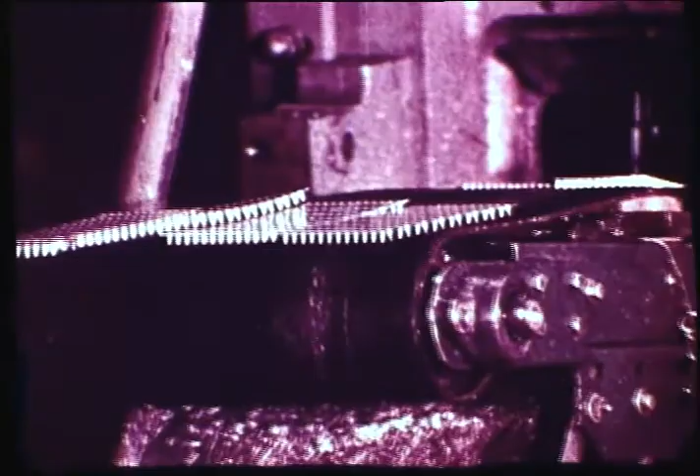Some of you know this story well. You've experienced it. Others are new to Alpine, and even to the industry itself.

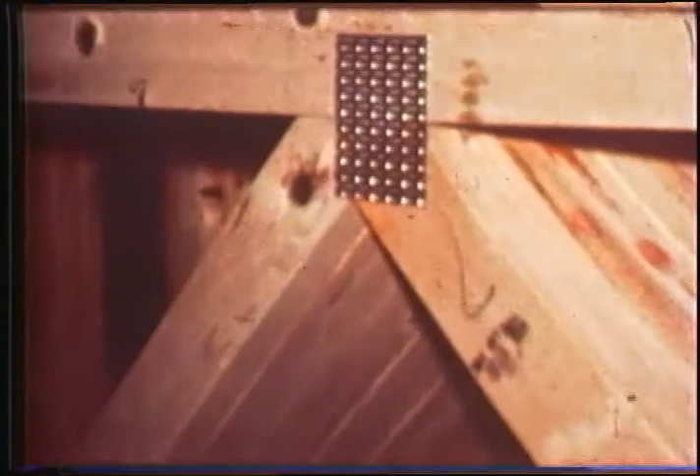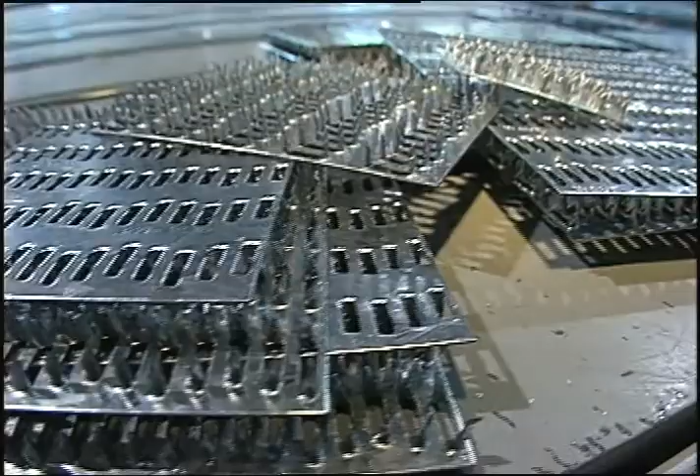The modern wood truss industry began nearly 50 years ago when Carroll Sanford replaced plywood gussets with metal nail plates that had teeth punched out to better hold truss pieces together. Over the years, many different connector plates were tried and tested for improved pressing and holding values. Today, the Alpine Wave Plate is the clear industry leader.

Five years out of Notre Dame, a young Bill McAlpin signed on as chief engineer with Sanford Company in Pompano Beach. A few months later, Charlie Harnden joined up as a salesman. By the middle 60s, they decided to go into business themselves, following disagreements with the strong-willed Sanford, who was not always as cheerful as he appears here.

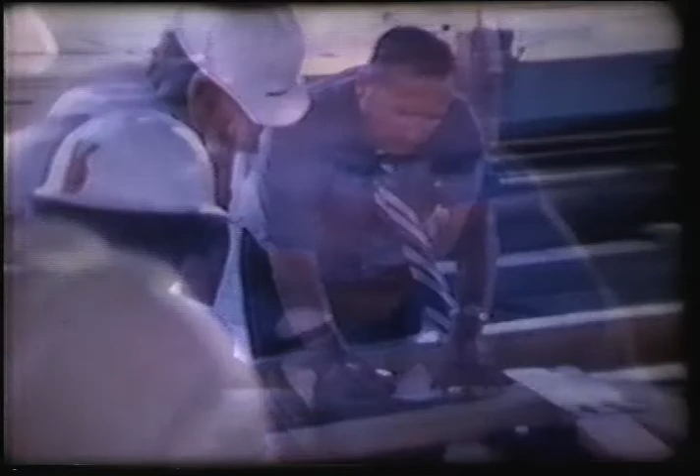Actually, he fired them. In 1966, Alpine's founders saw that the demand for safe, affordable housing far outweighed the ability of the building industry to keep pace. They realized that the biggest time saver during construction was to simplify roof assembly.

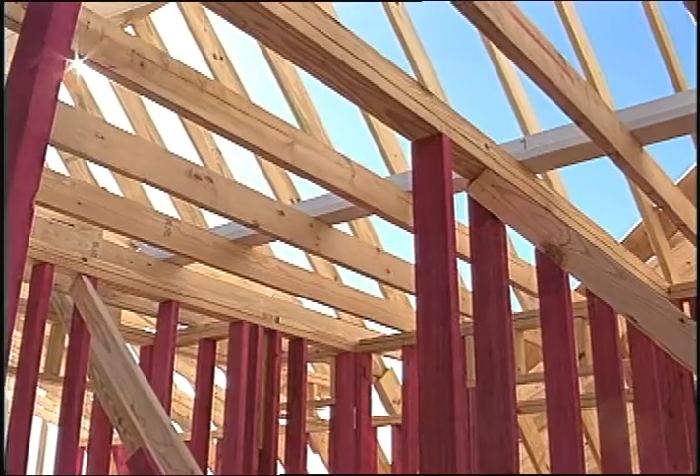Their business plan was pretty basic: design good, competitive trusses, sell the connectors that would hold the lumber together, and work closely with customers to get the job done, and done right. Their business philosophy was equally simple: provide customers with top-quality engineering, good delivery, and personal service. The customers' businesses would prosper and grow, and with a little luck, so would Alpine's.

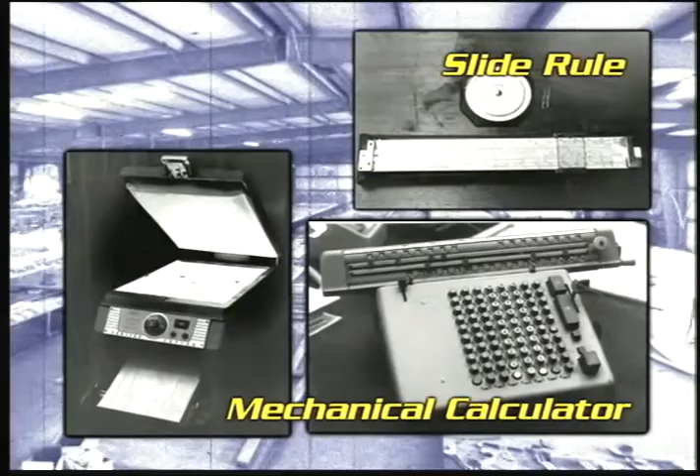Charlie and Bill started out in a 10 by 12 foot office, tucked behind a 7-Eleven convenience store in Pompano. Using a slide rule, mechanical calculator, and Verifax copy machine, they produced 200 truss designs for their 3 customers that first year. Last year, Alpine engineers reviewed 2.5 million designs.

1970 was a benchmark year for Alpine. The firm took initial steps toward becoming a full-service company by writing its own software, an optimizing and pricing program, and by working with LOEM Incorporated to develop a line of truss assembly equipment.

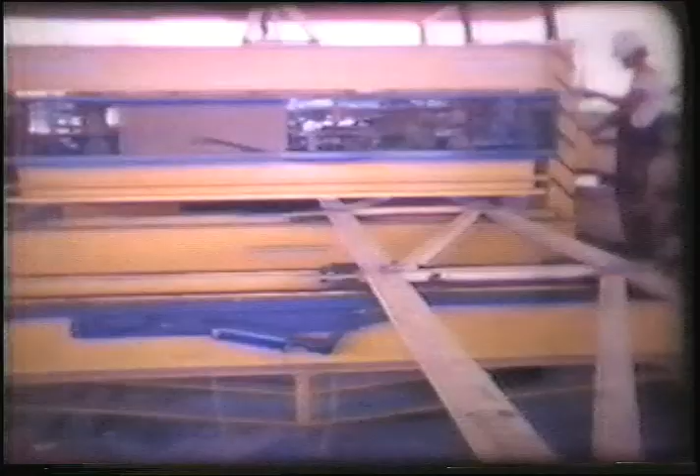By 1973, Alpine was beginning to look like a company with nationwide aspirations. It acquired a competing company and stamping plant in Tucker, Georgia, jobbed out plate stamping in Fort Worth, Texas, and had 60 customers subscribing to Alpine's CompuTime Honeywell computer over telephone lines to get cutting.

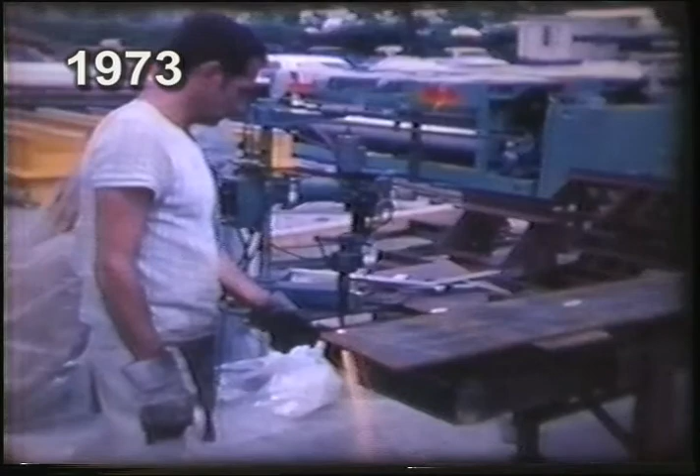They also purchased the aforementioned LOEM, which was purported to stand for Little Old Equipment Maker. It was run by Tom Maloney, a crafty Irishman who as a child was one of the members of the original Our Gang film comedy troupe.

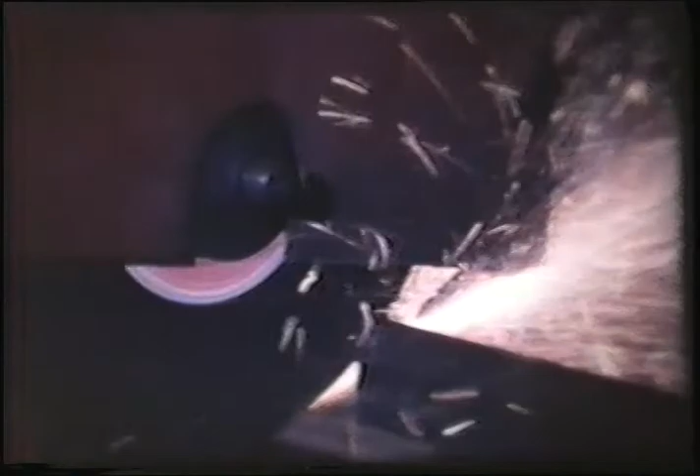Tom could make just about anything out of steel, and that year introduced 5 new machines to make floor trusses, specialty components, hip jacks, hip trusses, and bowstring trusses.

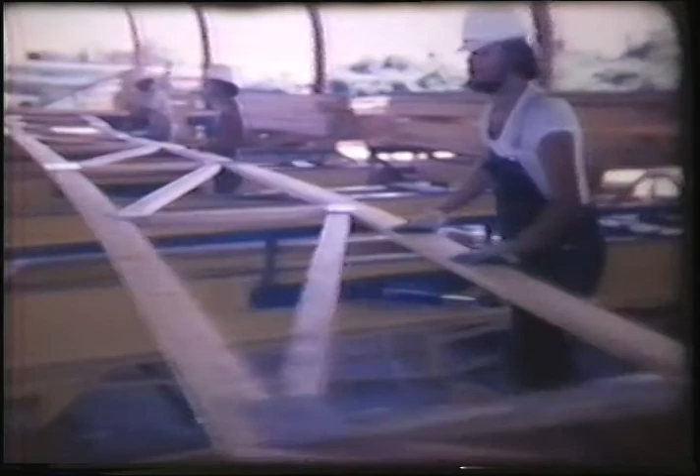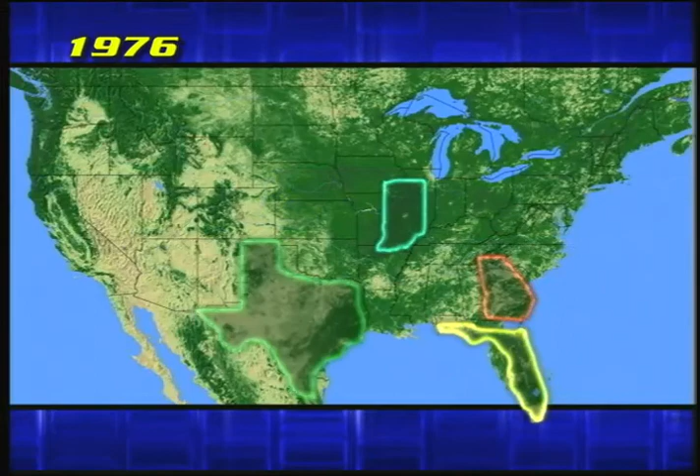3 years later, Alpine celebrated its 10th anniversary, even though the nation was just recovering from an 18-month recession. By then, the original 2-man firm had 85 employees, facilities in Florida, Georgia, Indiana, and Texas, and nearly 300 customers from Florida to Oregon to Maine to New Mexico. The Pompano Beach headquarters was located in 6 buildings, comprising 67,000 square feet.

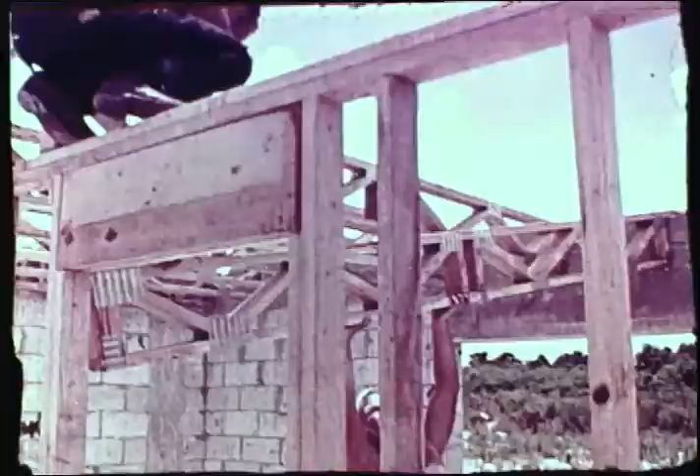Always involved in industry-wide education, Charlie Harnden helped form the group that preceded WTCA. He also commissioned one of the industry's first movies to help customers sell the advantages of the 4x2 floor system to builders and code officials, and developed a traveling commercial industrial sales school to help customers learn how to compete in that industry.

For a company to grow from a simple beginning to an industry leader in just 10 years, it constantly served the needs of its customers. This is the story of how Alpine meets the needs of the wood truss industry.

A total truss system is made up of quality truss connectors, fast, reliable engineering, computerized cutting and costing programs, and efficient truss manufacturing equipment. With computer engineering goes computer cutting and pricing service.

At a small cost, the computer terminal is placed in the truss fabricator's office. With this terminal, the fabricator has direct access to the Alpine computer programs stored in the multi-million-dollar time-shared computer center in Orlando, Florida. After preparing the data in his own office, the fabricator simply makes a toll-free call to the computer.

He gets immediate cutting and pricing information printed right in his office. Has the computer made your job easier? Yes, Bill, not only has the computer made their job easier, but it's made our operation more profitable. Would you ever go back to the old way? Not willingly, no.

Alpine's president, Charles Harnden, sums up Alpine's full-service philosophy. As you've seen, Alpine offers a wide variety of products and services. They've been developed to help our customer be more effective and more profitable in his own business operation. We feel that if our customer is successful, then Alpine will be successful. Our goal is to meet the needs of the wood truss industry. The Alpine Total Truss System is the result of working towards that goal.

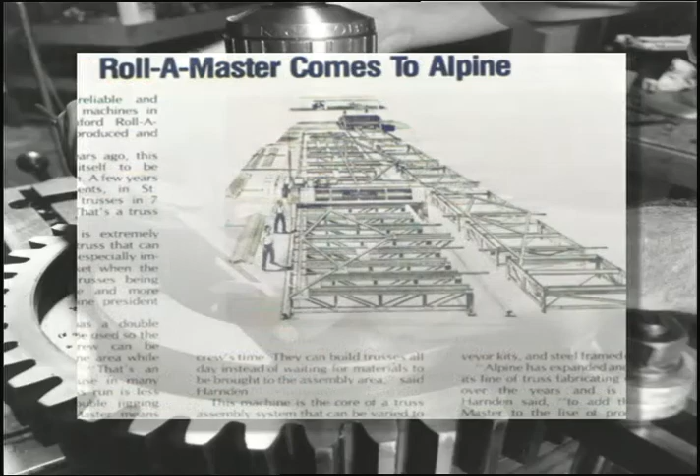In the late 1970s, Charlie Harnden and lumbermates George Eberly got together to found the group that became BCMC. The first equipment exhibition was held in 1980. Alpine showed the Ram Speed Roll, chord splicer, and informed about its new computerized truss layout program. Many Alpine customers have always been industry leaders.

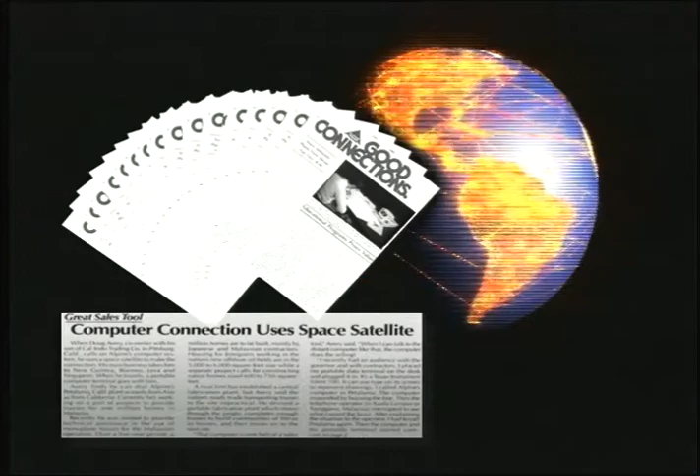For instance, an article in the 33rd issue of Good Connections newsletter told how a customer who was building trusses in Kuala Lumpur, Malaysia, used a Texas Instruments data terminal to access Alpine's computer in Petaluma via a space satellite. The internet, as we know it, was still many years away.

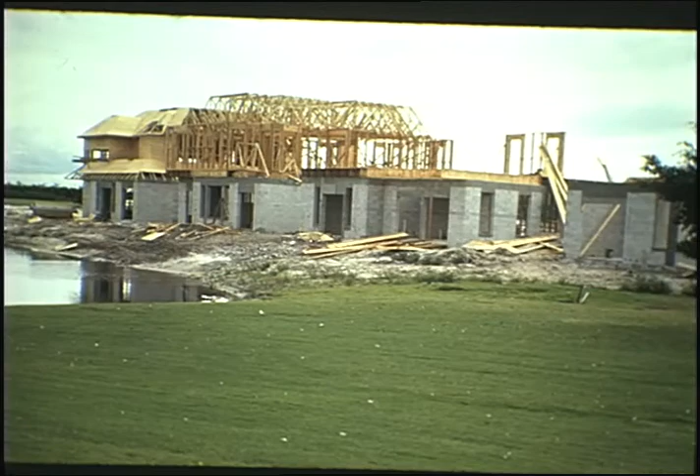Oddly enough, by the 15th anniversary in 1981, the nation was once again struggling to get out of another recession. Economists hoped that by spring of '82, construction would improve because home loan interest rates could be all the way down to about 13%. Meanwhile, Alpine remained bullish.

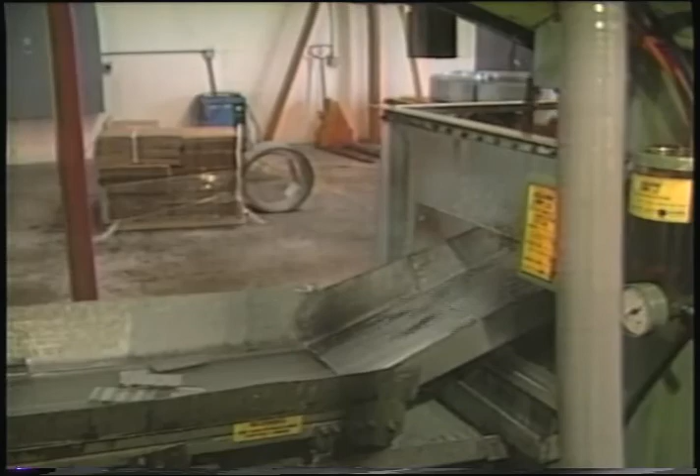The company had established engineering and connector plate manufacturing operations in Pompano Beach, Florida, Tucker, Georgia, Beltsville, Maryland, St. Charles, Illinois, and Petaluma, California, and an engineering office in Arlington, Texas.

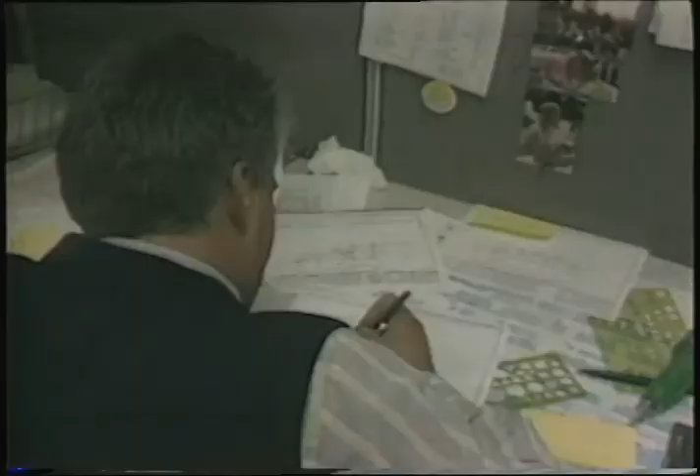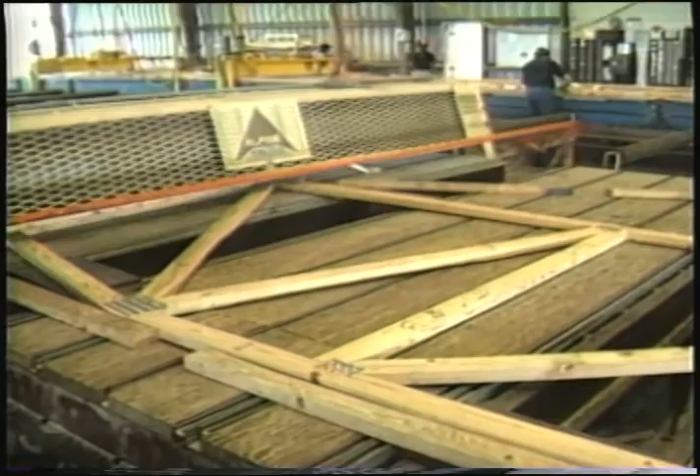The Speed Roll System 42-floor truss machine had been well received in the marketplace, and Alpine was manufacturing the Sanford Rollamaster, the most productive truss fabrication machine the industry has ever known, versions of which are still the core of our equipment line. The anniversary was celebrated during the 11th annual Alpine Truss Manufacturers Workshop at the Marriott Hotel and Marina in Fort Lauderdale.

In reminiscing, Bill McAlpin noted that the first Alpine design manual he and Charlie produced in 1966 contained 48 drawings, which they thought was complete. But by 1981, Alpine had 237 design manuals, each containing an average of 75 drawings, and it still wasn't enough.

When Charlie Vaccaro asked if he thought some new technology might replace the wood truss, he said, 'I don't think that'll happen in our lifetime. I see a greater role for trusses in the years ahead. But that's not to say that the I-beam with the plywood center doesn't have a place in our business. I think it will replace the 2x10 and 2x12 joists and rafters as they become scarcer and harder to get.'

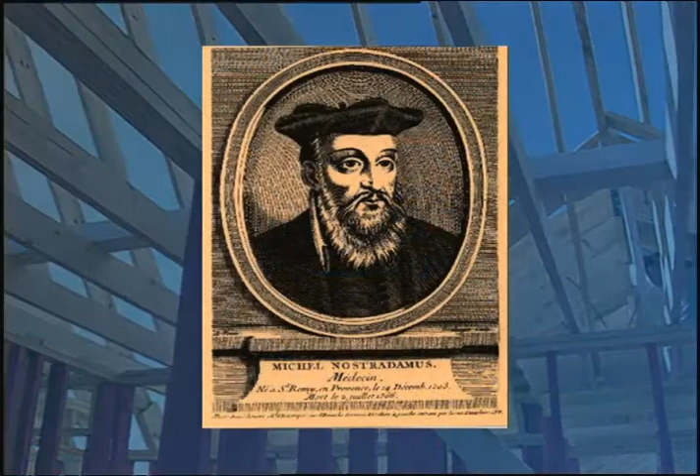Though we're not ready to call Charlie the new Nostradamus, today's I-beams and engineered lumber products prove his prediction was right on the mark. The company continued to aggressively develop the Alpine brand, which has become well known through its many educational programs.

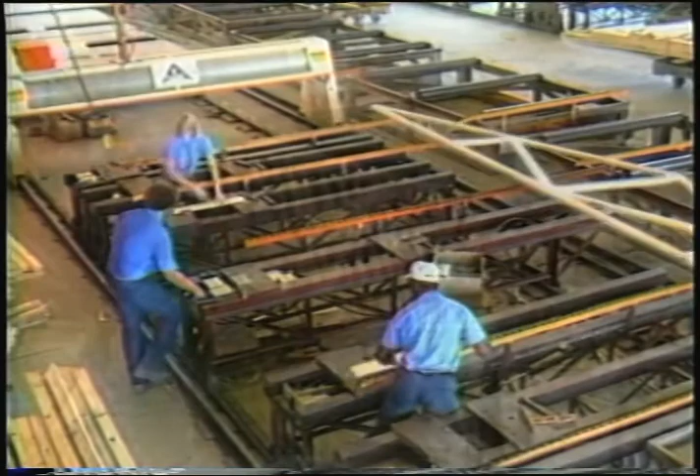More than 70,000 design professionals and specialists could learn about trusses in an annual insert in Sweet's catalog that was initiated in 1974 and would continue each year until 1996.

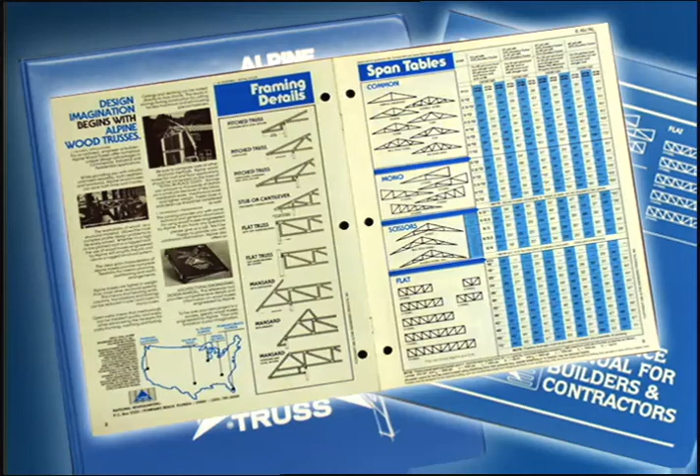They could also receive the Architect and Engineer Manual, a 3-ring binder containing a host of information, span tables, and details. A similar binder was distributed to builders and contractors. Alpine also co-produced seminars with customers to help educate architects, engineers, contractors, and building officials on the benefits of engineered wood trusses.

To help customers in their plants, workshops for foremen and plant superintendents were conducted around the country. A quality control program was developed that included a slide presentation and a series of posters for the plant. During this period, the large Alpine planning calendars began decorating the walls of customers' plants and offices across the country.

The customers are changing, and they certainly do feel like the computer is part of their life.

It simplifies a lot of their jobs, and sometimes I think they don't understand all of the things that are behind the scenes, as Bill said, the things that really make it work, and the years of testing and experience it takes to make the program correct. They're becoming more sophisticated. They're able to understand what it takes to make a truss figure. They can add webs, or make little changes in the design to make something work, whereas before they had no idea.

By 1983, the economy was improving. Fabricators were upbeat, Alpine's manufactured housing division was contributing to the bottom line, and Alpine went into the I-beam manufacturing business. A popular phenomenon of the time was competing among fabricators to see how many trusses could be produced in a single shift. Good Connections duly reported the results.

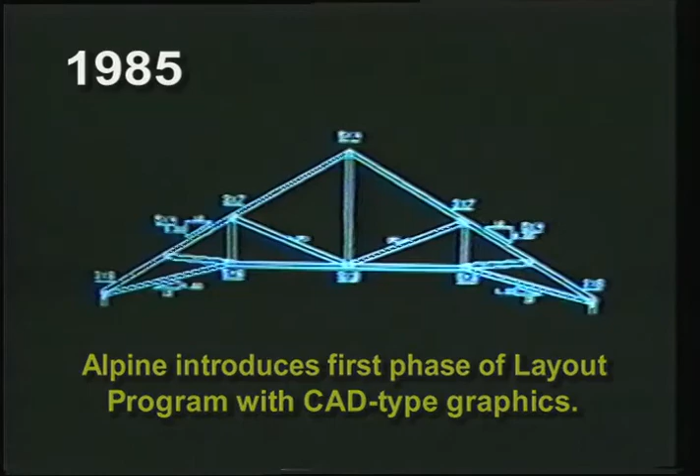Workshop number 14 in 1985 featured a tour of Alpine's recently opened Haines City, Florida plant. Alpine introduced the first phase of its layout program with CAD-type graphics. A year later, Alpine's TrussCalc software enabled customers to use IBM PCs as intelligent workstations.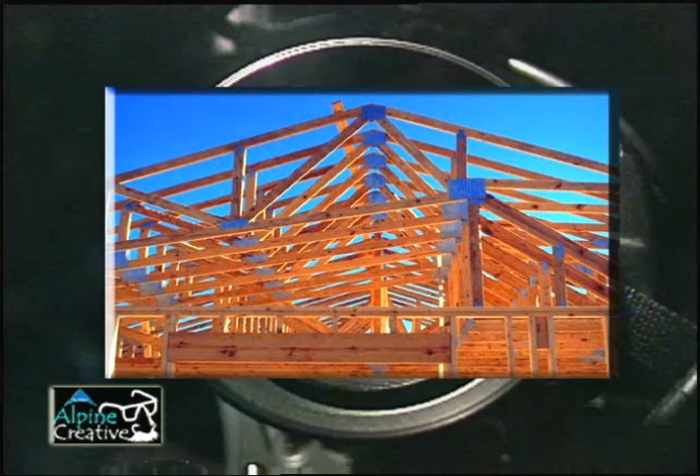Also that year, Alpine embarked on what was to be an ambitious program of video production and educational use to help sell machinery. The first was a conversion to video of a handling and bracing slideshow. Next came the lumber carousel, still being shown today. Another feature, the Roll-A-Master line, and one on R&D testing, is also still in circulation.

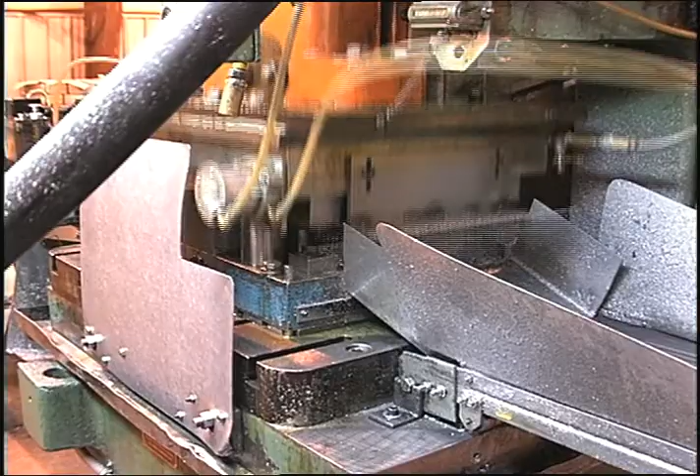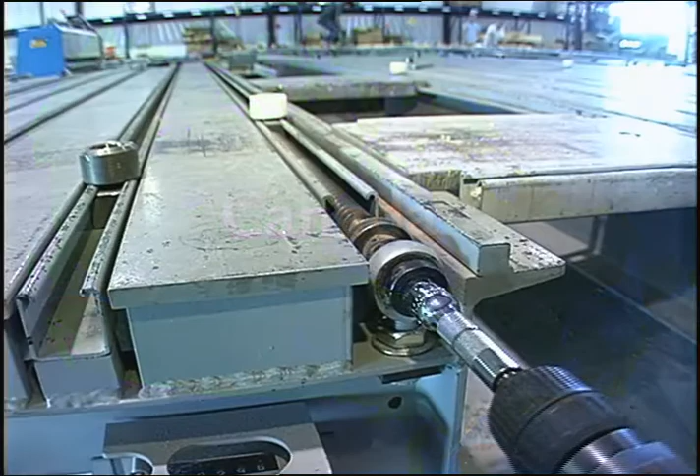The following year, plate manufacturing began in a refurbished Litchfield, Illinois plant, and Alpine acquired a majority interest in Alpine Systems Corporation of Canada. As the decade drew to a close, AutoSet 2 was making headlines, and a 27-minute movie about Alpine appeared on cable TV across the country. Alpine's 25th anniversary in 1991 found the nation in yet another recession.

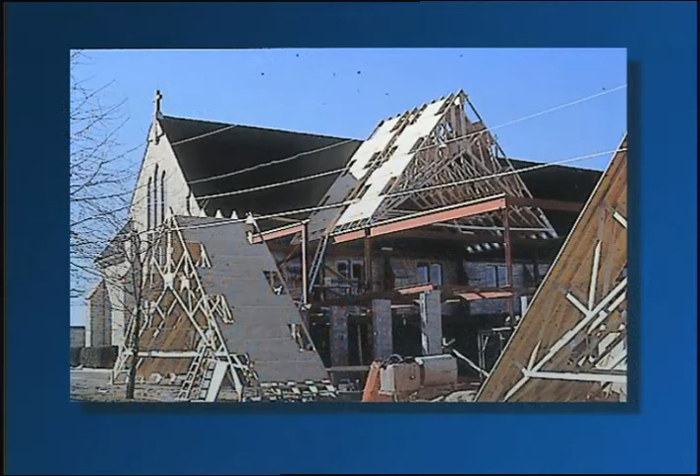One truss manufacturer observed that church construction was likely to increase, which would be good for truss fabricators. He said, 'Churches are often built when the economy is depressed. They always find a way to get the money.' Turned out, he was right.

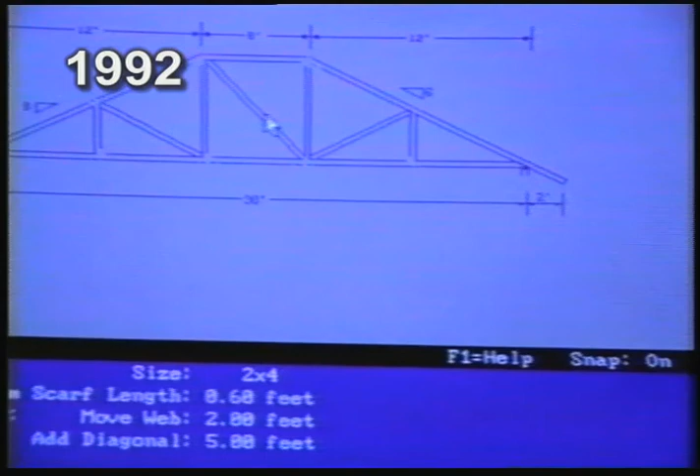This program brings a substantial departure from previous versions of the truss analysis program, because previous versions have been data file based, and the new program, TrussCalc 92, is graphics based. This means that as you flip a web, change a web size, or stub a truss, you see that change immediately on the screen. TrussCalc 92 was introduced.

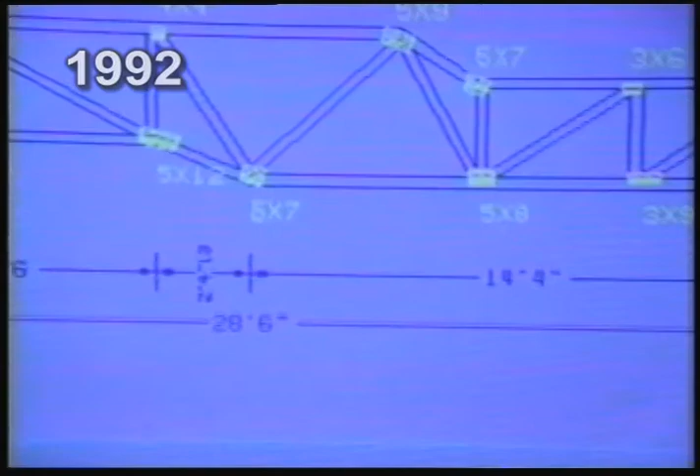Alpine began expansion into the European market in Germany and purchased DuPont International, a Belgian manufacturer of component saws.

In 1993, Bill McAlpin asked a workshop audience, 'How many of you have been attacked by a spotted owl, or a red-cockaded woodpecker, or a California gnatcatcher? One way or another, we all have.' The Endangered Species Act has cost all of us lots of money and higher lumber prices, and as far as I can see, for very little reason.

Good Connections that fall boasted that the Automaster computer-controlled saw could make 50 setups and cut 335 pieces in less than an hour. What's more, it was true.

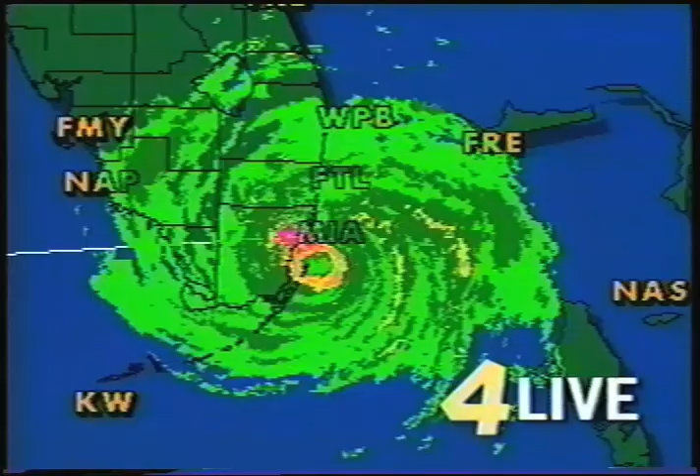The same issue featured Charlie Hoover's Lessons of Hurricane Andrew, to this day a frequently downloaded article from our website. Also included was a 4.5-page article by Stu Lewis on why and how Alpine conducts a major ongoing truss testing program.

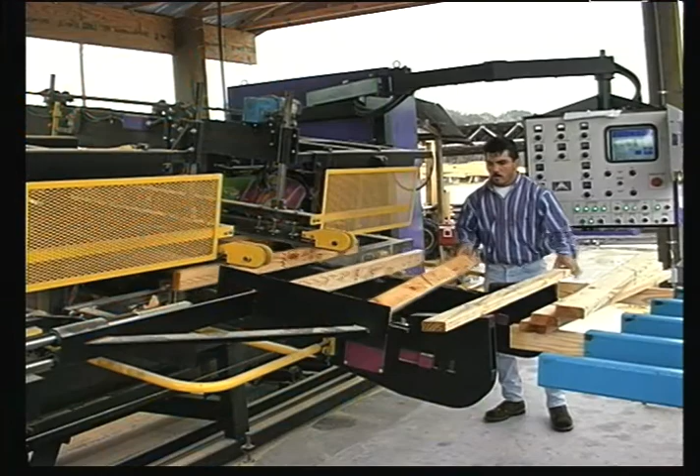At BCMC 94, we once again stole the show when we took the wraps off, literally, of the concept saw, later named the AutoWeb. The industry-leading auto mill component cutter was soon to follow.

The following year at BCMC, we kept up the pressure, and we demonstrated the industry's first internet website.

Hi, my name is Katie Bassani, Projects Coordinator for Alpine's Computer Services Department. This winter we're releasing a brand new update. We call it the Integrated System Light version from Alpine. If you drink enough of this stuff, you may not notice the granulars, or you may not care. Order now. That's Katie's wacky Integrated System Light. Call 1-800-ALPINO. Operators are standing by.

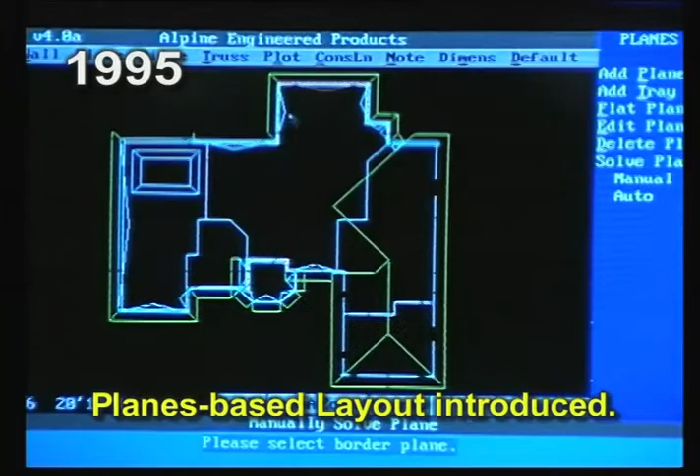The best part about this is, when I add trusses to that area, that inverted hip profile will be built right in. 1995 also saw the introduction of planes-based layout.

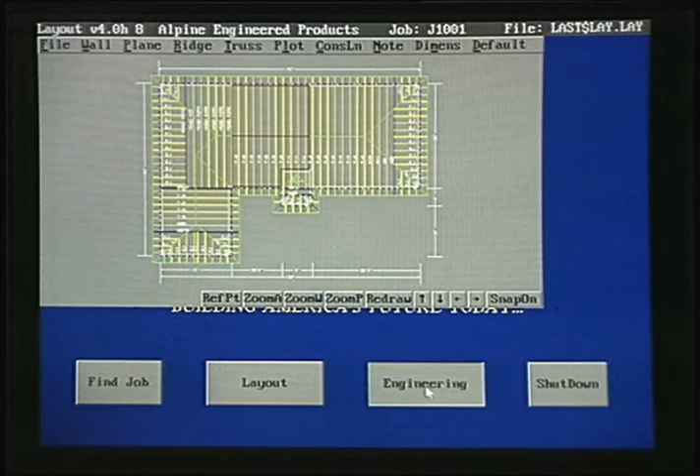This winter, we're releasing a brand new update. We call it the Integrated System Light version. This update is very large in scope. It contains some projects we've been working on over the past 2 years. If you hit the Layout button, it'll bring up the current layout on your screen. If you hit the Engineering button, it'll take you to the current truss for that particular job.

A job-based design method is one of the paradigm shifts necessary to take advantage of the software technology available in the market today.

The electronic exchange of information from the architect one day will go further than just the truss company. One day building departments will be reviewing electronic drawings, and contractors will be opening up laptops at job sites instead of unrolling blueprints. Of the many videos Alpine produced during the 90s, 3 are important sources of revenue for WTCA: Safety in the Truss Plant, HIB 91, and Framing the American Dream.

The balance of the 90s saw the grand opening of the Grand Prairie, Texas plant, the introduction of the wave plate, the emergence of truss steel, the debut of the auto mill component cutter, the breakthrough integrated system, the going full throttle design challenge, the sudden death of Charlie Harnden, and the subsequent purchase of Alpine.

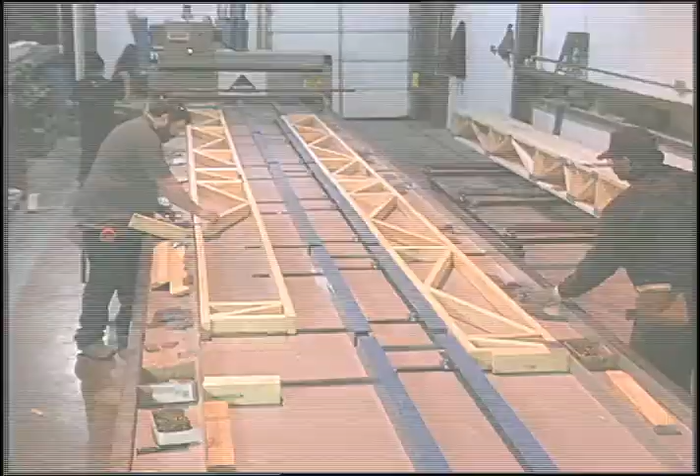As we enter the new millennium, 2 exciting new machines were introduced at BCMC 2000, the Floormaster and the Ram Easy Rider. In keeping with Alpine's philosophy of continual improvement and product development to help our customers operate efficient and profitable businesses, we're proud to introduce ArmaDeck and ArmaTile.

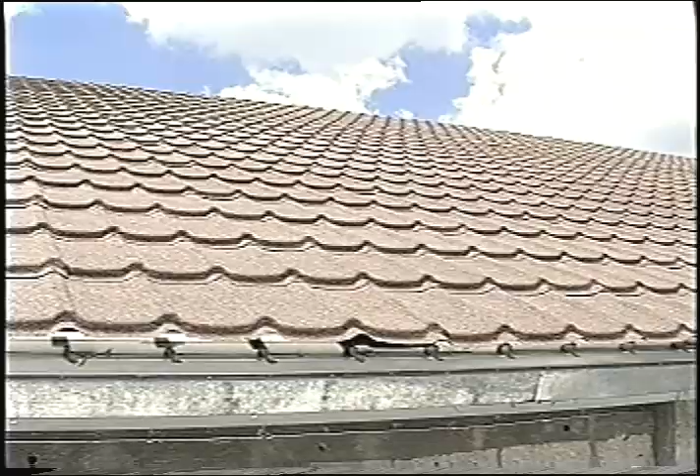Structural metal roofing tile provide the basis for Alpine's goal of providing a total roofing solution.

Change is coming. Success will be about working harder, about working smarter, about working together. The future has never been brighter.

Trust, vision, growth. Alpine. Technology-driven products and services for the building industry.